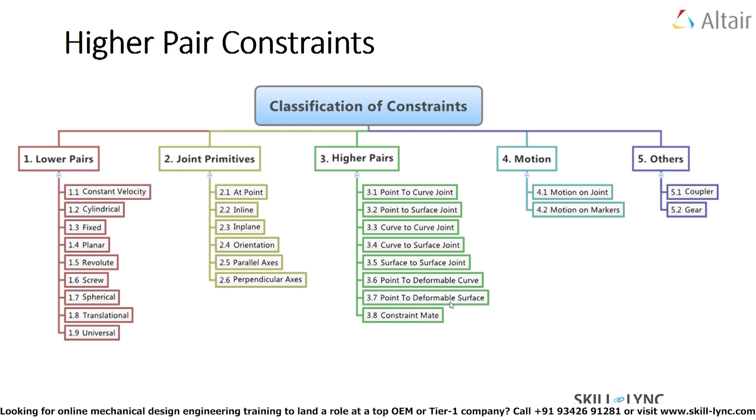As you can see on the screen, the classification of constraints shows the various types of constraints available in MotionView MotionSolve. We've already gone through the lower pair constraints and joint primitives in the previous chapters, and in this chapter, we will be concentrating on the higher pair constraints. We have the following higher pair constraints: the point to curve joint, point to surface joint, curve to curve joint, curve to surface joint, surface to surface joint, point to deformable curve joint, point to deformable surface, and constraint mate. So let us start with the point to curve joint.

A point to curve joint is a higher pair constraint. This constraint restricts a specified point on a body, as you can see in the animation on the screen, to move along a specified curve on another body. This hammer-like structure has a particular point that is resting on this curve and it is moving along. The curve may be open or closed, planar or in 3D space. The point may be a rigid, flexible, or a point mass.

This constraint can help in avoiding 3D contact modeling, because 3D contact modeling is very time consuming and involves many complex equations. So you can use this point to curve joint in some cases to substitute the contact modeling. It may prove advantageous since proper contact modeling in many cases involves fine-tuning of contact parameters. One good example of that is the knife edge cam follower mechanism.

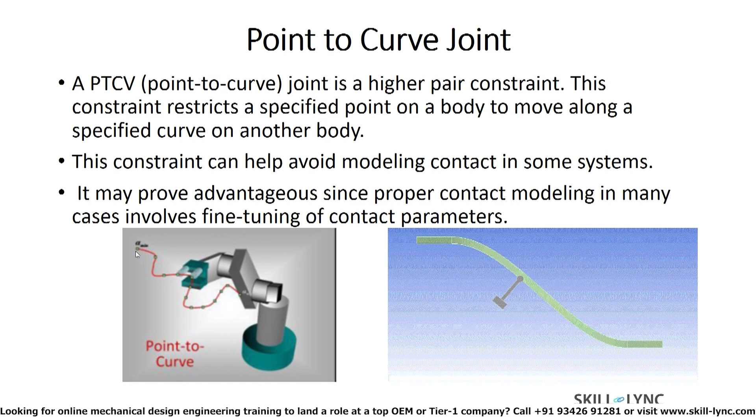In the left hand image, you can see a robotic arm. This is another example of the point to curve joint. On the right hand side, there's an example of this hammer-like structure moving along this particular curve path. In the left hand image, the robotic arm is trying to move along this particular curve that's been prescribed by the user. So these are some of the examples of point to curve joint. Now let's move on to the next slide.

This slide gives us a brief description of the point to surface joint. A point to surface joint, also called the PTSV joint, also falls under the category of higher pair constraint. This constraint restricts a specified point on the body to move along a specified surface of another body.

In this slide, you can see that this needle-like structure is, say, body I, and this irregularly shaped structure is body J. It will allow the tip of this needle-like structure to move along a particular trajectory on the surface of body J. So the tip of body I moves along a prescribed path on the surface of body J.

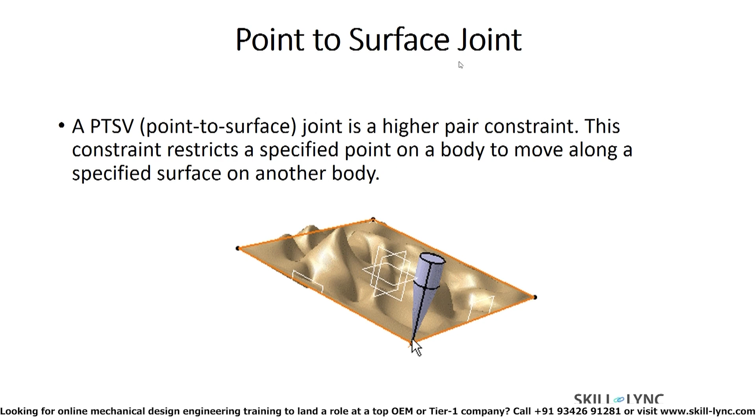So in this case, we can define a point to surface joint. So the next one is a very important joint, which is the curve to curve joint. Curve to curve joint is a higher pair constraint. This constraint consists of a planar curve on one body rolling and sliding on the planar curve

of a second body. So this constraint can act as a substitute to the contact modeling in many cases. This will eliminate the complex formulations of the contact model, thereby making it much easier for the solver and also reducing the run times. One such case is a CAM follower mechanism, which is shown in the next slide.

So in this case, the follower is in the form of a roller. Instead of modeling the contact between the CAM and the follower, we can specify a CVCV constraint between their curve profiles. We can go on to the next slide. Here, one thing that you need to note is the curve-to-curve constraint removes 3 degrees of freedom from the system. Let's move on to the next slide.

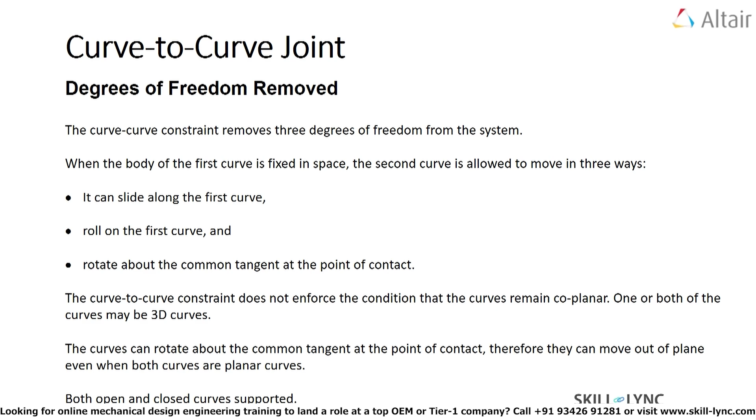So when the body of the first curve is fixed in space, the second curve is allowed to move in 3 ways. Say this curve profile of the roller is the first case. Consider when the body of the first curve is in fixed space, the second curve is allowed to move in 3 ways. It can slide along the first curve, it can roll along the first curve, and it can rotate about the common tangent that you have.

If you have the path of this roller in the form of a curve, and the path of this CAM as another curve, then you can see you have a common tangent between the roller and the CAM, right? So it can rotate about the common tangent at the point of contact. So these are the 3 degrees of freedom that are removed.

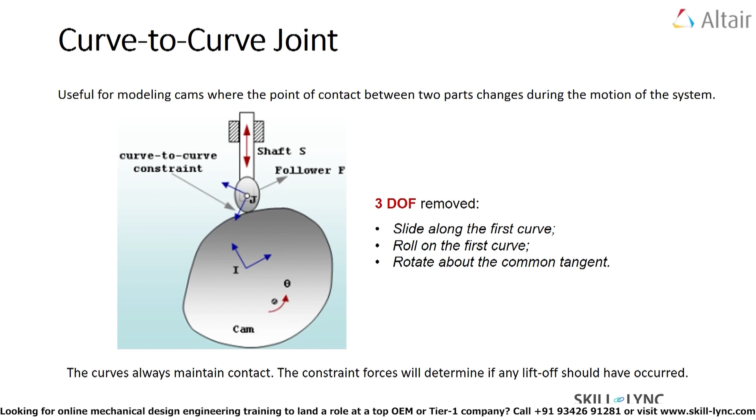So the curves can thus rotate about the common tangent at the point of contact, and therefore it can move out of the plane even when both the curves are planar. I think this will be more clear to you guys when we do the exercise demo on chapter 10. Let's move on to slide 8.

So this is basically the curve to surface joint. This joint is used in very rare cases where the curved region with a very small thickness of body A interacts with the surface of body B. In these cases, we use the curve to surface contact. It is basically the interaction of the 2D spline with the 2D plane. Now let's move on to the next slide, which is the surface to surface joint.

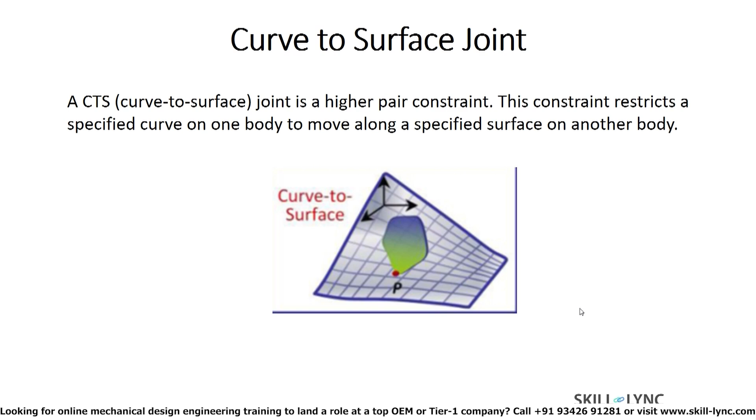If we want to constrain the surface of one body with the surface of another body, this constraint can serve as a very good substitute again to the 3D contacts, which can increase complexity, so this will help in decreasing complexity and simulation time. We can use this constraint to calculate the friction losses between the two bodies that have surface to surface interaction.

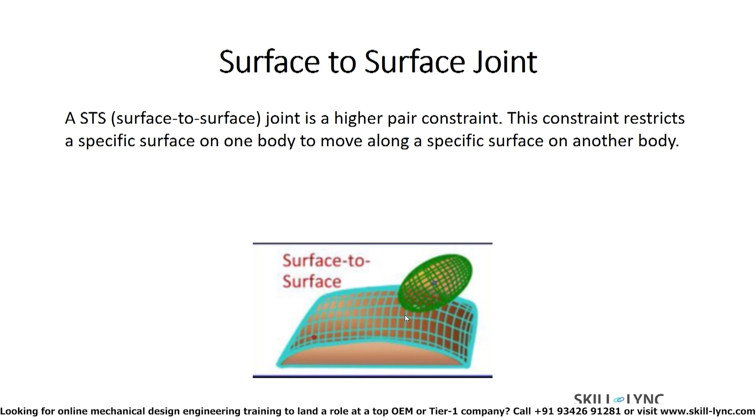Now moving on to the next slide, it is the point to deformable curve constraint, also called the PT-DCV constraint. It again falls under the category of higher pair constraint. This constraint restricts a specified point on the body to move along a specified deformable curve on another body. The curve may be open or closed, planar or in 3D space. The point may be rigid, flexible, or a point mass.

We can consider the example of a long stick supported by revolute joints at both of its ends, and a ball or a mass constrained to move along this stick with a PT-DCV joint, a point to deformable curve joint. Here, this long stick can act as a slender beam, so that can be the deformable curve, and this point mass moves along the curve.

Please note that this type of constraint does not always ensure that the contact point between the two bodies will always stay within the range of the specified curve.

So additional forces at the end need to be defined by the user to satisfy this particular requirement. So if the contact point goes out of the range of the data specified for this particular curve, the solver encounters an error. So the solver is going to throw an error saying that this particular simulation cannot be converged.

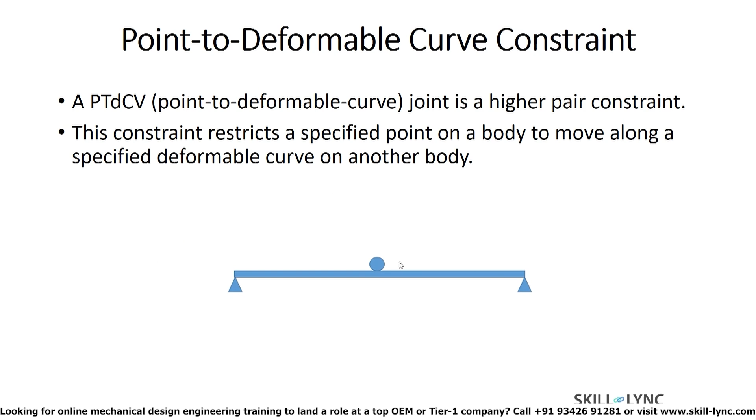Point to deformable curve constraint. So the point to deformable curve is a higher pair constraint that restricts a specified point on a body to move along a specified deformable curve on another body. So here you can consider the example of the ball or the mass on a sheet of paper that's constrained on two ends.

So the sheet of paper acts like a flexible body on top of which the ball is resting. So if this constraint here is applied, as and when the ball moves on the deformable sheet of paper, the z displacement of the ball can be calculated. So again, this can serve as a very good substitute for the 3D contacts involving flexible bodies.

So that will be explained in the next chapter, wherein I cover the 3D contacts. In MotionView, we do not have the 3D contacts established for flexible bodies. So in that case, this particular constraint can serve as a very good substitute.

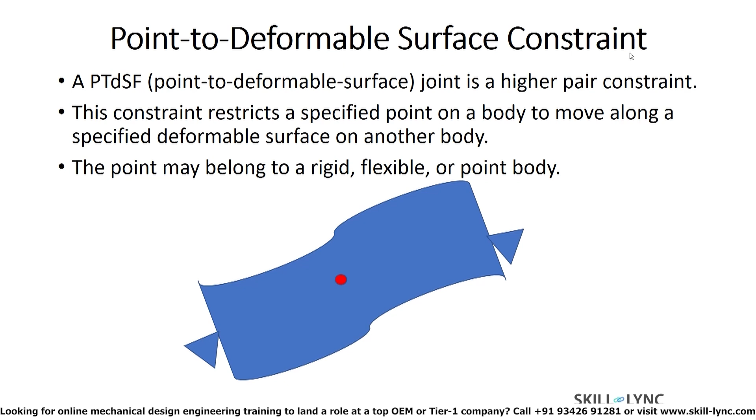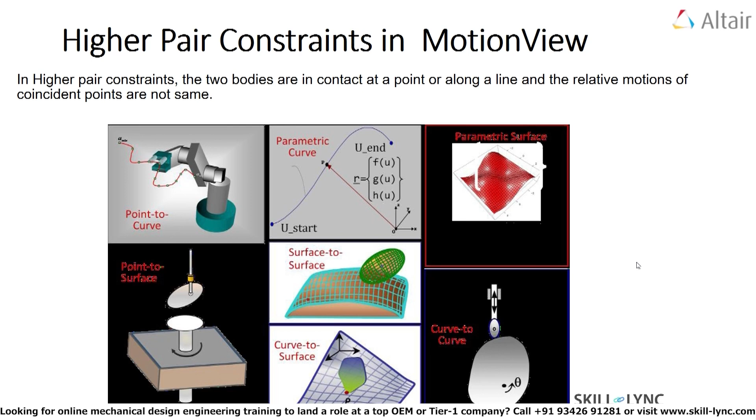The point to surface constraint can eliminate 2 translational degrees of freedom and 3 rotational degrees of freedom. So in total it can remove 5 degrees of freedom. The curve to curve constraint eliminates 2 translational degrees of freedom and 1 rotational degree of freedom. So in total, it can eliminate 3 degrees of freedom.

The curve to surface constraint can eliminate 2 translational degrees of freedom and 3 rotational degrees of freedom. So in total, it can eliminate 5 degrees of freedom. The surface to surface constraint can also eliminate 2 translational degrees of freedom and 3 rotational degrees of freedom. Hence, it can eliminate 5 total degrees of freedom.

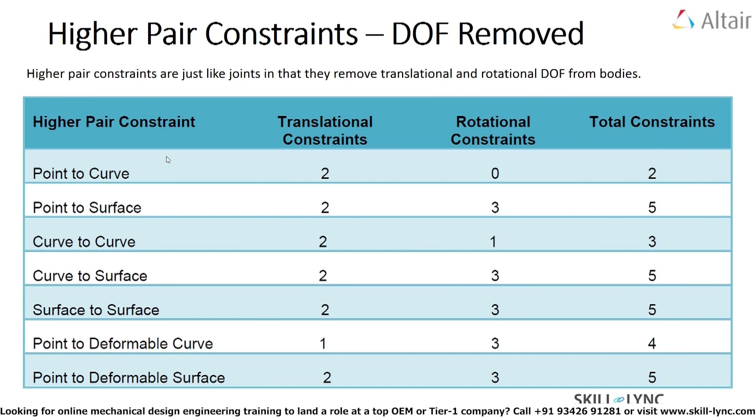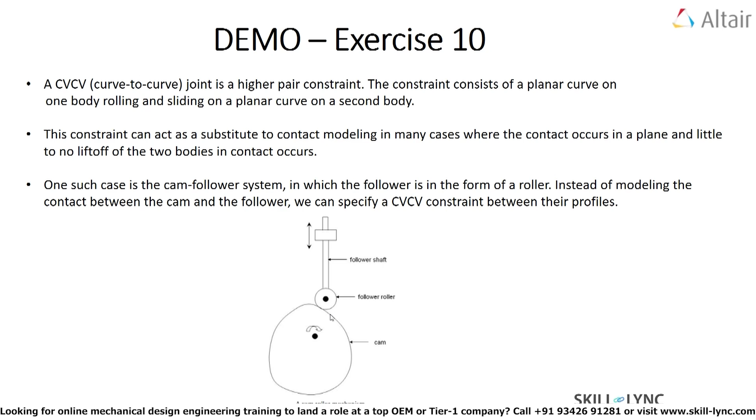So instead of creating a 3D contact between the cam follower and the cam, you can use the profile of this particular cam. You can capture that as a curve, a 2D spline, and also capture the path along which this cam rotates. You can take that path as another curve, and establish a curve-to-curve joint between these two profiles. So this reduces the runtime and also the complexity of the equations involved in formulating it. So this is something that we'll try to simulate in exercise 10.